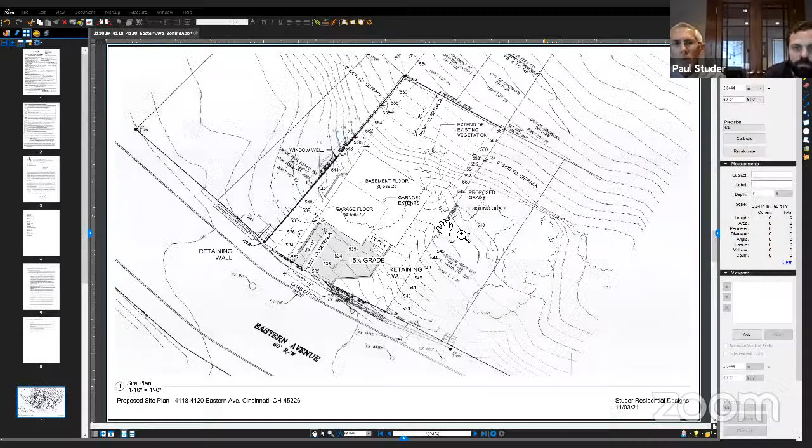As you can see from the site plan, the grade at the front of the lot is at 532. At the back of where we're proposing to put the house, we're at 550. So because of the rise in the lot, we have to have more than an 8-foot foundation just to accommodate the rise in the space.

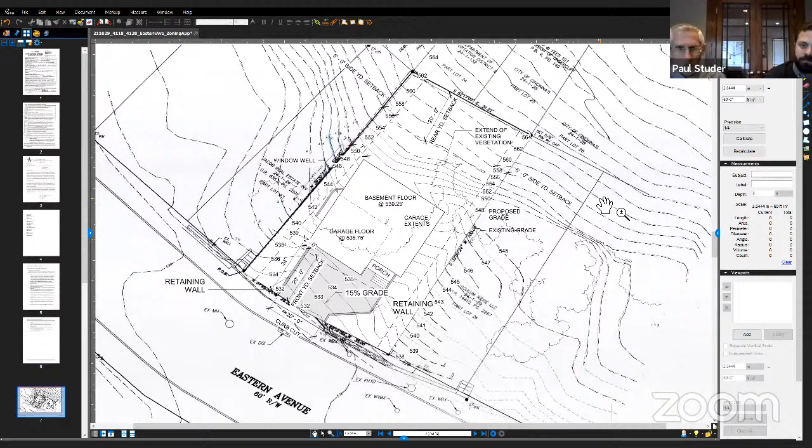There is a section shown in our plans. We can go to that next. It's a side elevation section, which shows approximately how we're planning on setting this house to the site.

Now, because of the maximum slope of the driveway, working at a 532 elevation, we gain a little bit of space there, but within the building, we're going to step up 4 feet from the garage into the rear of the house and then base that on a 10-foot foundation, but that still doesn't get us to even with the grade at the back of the house. We're looking for a 14-foot wall at the back of the house, a 4-foot drop through the house, and then there's a 30-inch frost wall at the front.

So we're ultimately looking at about, I think, 19 feet total excavation that's going to be required from the front of the house to the back of the house. And since the zoning code for the hillside only allows 8 feet, we're looking for 11 feet of relief in that area.

Now, the house has been designed as shallow as we possibly can to accommodate the rooms that the owner is requesting. He has purchased 2 lots and combined them so that we have a little bit of room to get relief, with approximately a 14-foot foundation at the back of the house. That's the reason why we're looking for the relief from the zoning restrictions.

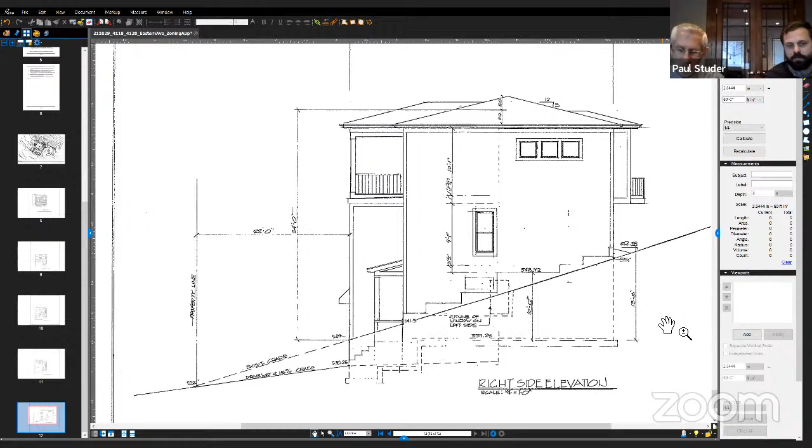I don't know if we need to go through the responses that we put into the application, or if you've been able to review that, section 6 of reasons why we're trying to ask for relief. I've already kind of explained the excavation that's required just to put a house, any house, on that lot.

It's going to have to require a front entry garage. Because of where we're placing it, we shouldn't have to have any issues with any severe cuts in the lot other than right at the foundation. We're not planning any retaining further up in the hillside.

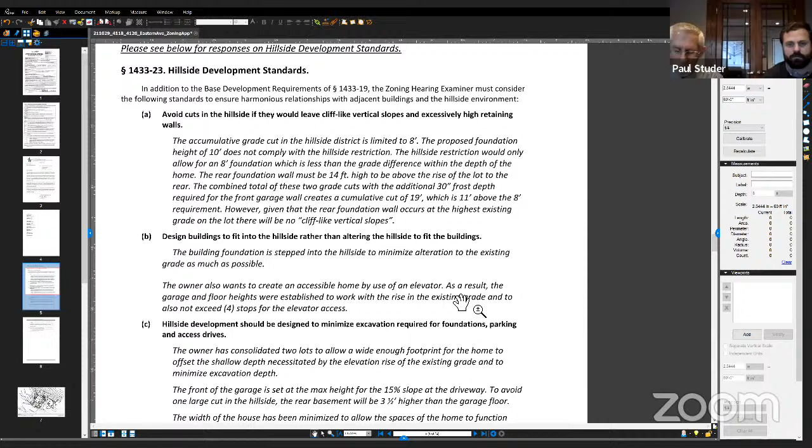There's a little bit of retaining on the side of the house, a 4-foot wall for an egress window. And then at the driveway, just because of the difference from the maximum grade we can have for the driveway and the existing grade, we will probably have about a 4-foot retaining wall at the house, but it will be gradually grading down to nothing as we get to the sidewalk.

One of the other reasons we are putting a step in the house as you go from the garage to the basement is that the house is designed to be somewhat accessible, possibly for a parent, for Henry. So we're putting an elevator in, and by creating that 4-foot separation, we're trying to limit the number of stops on the elevator to 4 stops.

So the design incorporates some work with the site to try and bring the basement floor up in the back so we don't have so much of a cut in the back of the lot. But cumulatively, we still end up with a 19-foot cut into the lot.

I think that covers most of the general information. Okay, great. Anything else right now? I don't think so, unless there's questions about something specific. Obviously, questions about anything.

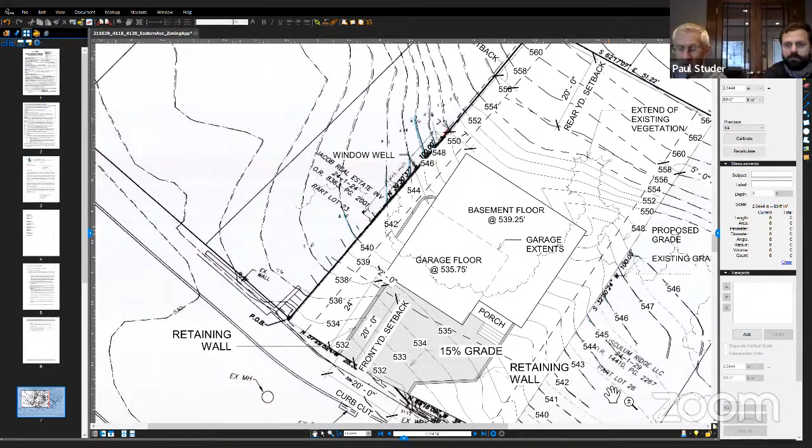Sure. Well, did Mr. McDonald or Mr. Balls want to add anything to the presentation so far?

No, I'm good. Okay, great. Trey, why don't you jump in if there's anything you wanted to add, and then I'll fire up some questions.

Sure. Well, first I'd like to point out that this completely complies with the maximum building envelope. David, you'll find that this house, while designed by a different team, is somewhat similar to a house two doors down that you just approved earlier, at 4112. That was part of a Peter McGarry project at 4112 Eastern. There's just one little sliver lot separating the two of them. It's very similar - that house also complied with the building envelope, but needed less relief for the cut and fill. I'm going to share my screen here for a minute.

Let me bring this over. You guys see that? No, not yet. I'm sorry, I didn't hit it then. Sorry. There we go. It's showing now? Just a sliver of the top of your web browser there. Oh shoot, no, we got it. That's it, that's it, all right.